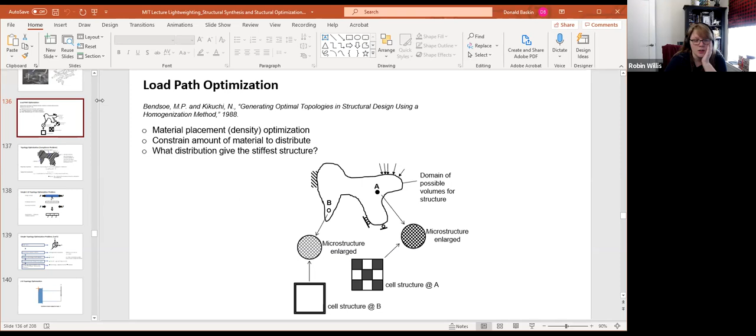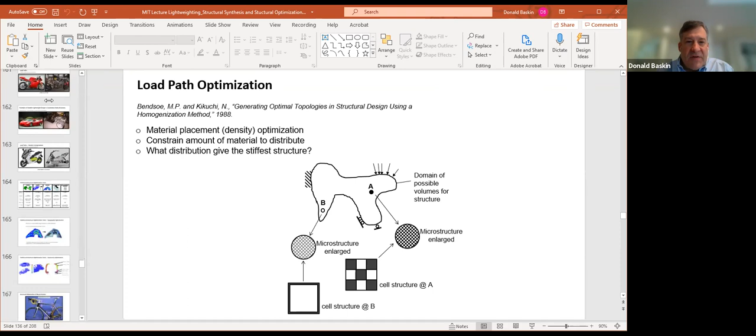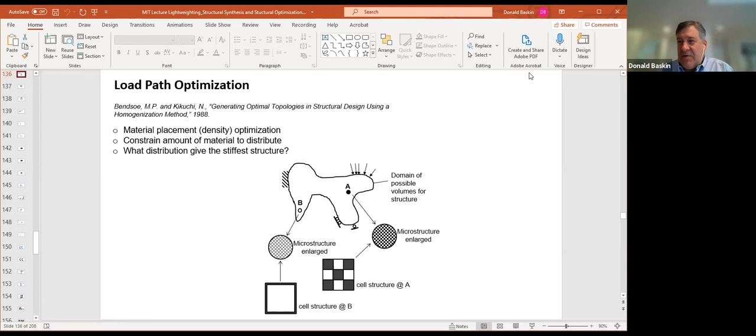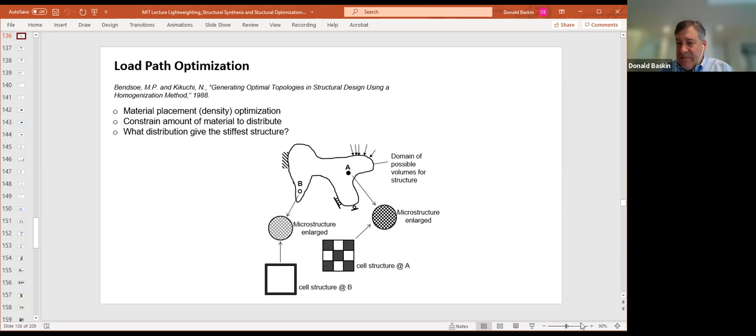I did have a question about our lecture summaries. Should we try to edit them down so they're exactly 1 to 2 lines per lecture, or is that more of a general guideline? Well, I don't know Professor Eager's exact policy, but I know his philosophy: in any given lecture there's only so much you'll find important, so there's only so much you should worry about remembering. Whatever it takes to feel like you've written down what you need to know, whether it's 1 line or 1,000, I'm sure he'll be okay with it. That's what I'd say.

How many lines do you think you're writing per lecture? I mean, usually like 2 or 3, it's just some of them. Like the strengthening mechanism lecture, for example, because there were so many different types, having a note about what each one was makes it a bit bigger. Well, if that's what it takes, that's okay.

I think this is something good to carry with you outside of university, whether you go into academia, industry, or government: get in the habit that when you're out of a meeting, you sit down for a couple minutes and ask, what did I really learn today? Writing it out makes it stick, at least for the way my head works. I'd remember it for years, the importance of that particular lecture. So whatever it takes to accomplish that.

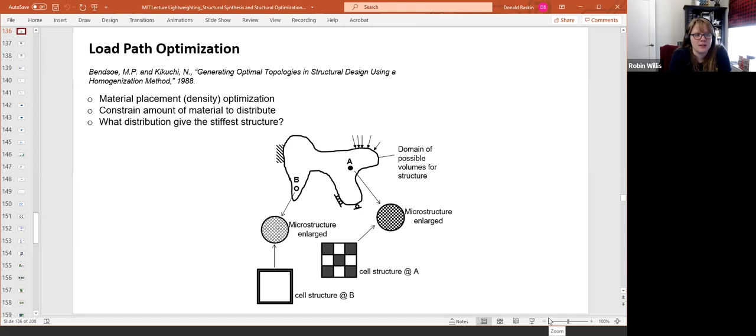Robin, I don't know if you saw, but there was additional guidance in the syllabus that whatever you submit shouldn't be more than 3 pages, which for a double module like this comes down to about 1 page, if that helps refine it. That's kind of what I was asking, especially for me. I like organizing things in bullet points and sub-bullet points, but that expands the technical length since you're not taking up the full page for each bit.

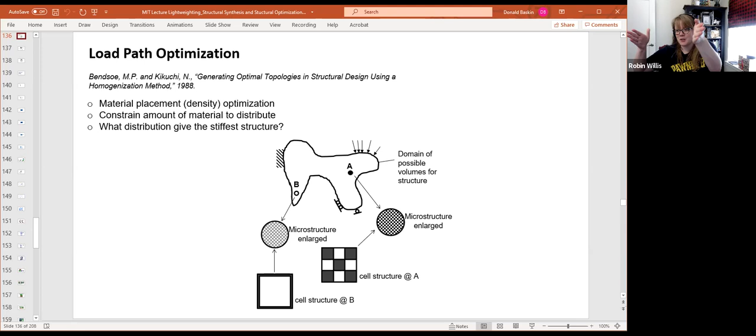That's right, he's not going to bark at you, don't worry. And if he does, just tell me and I'll say it was okay, blame it on me.

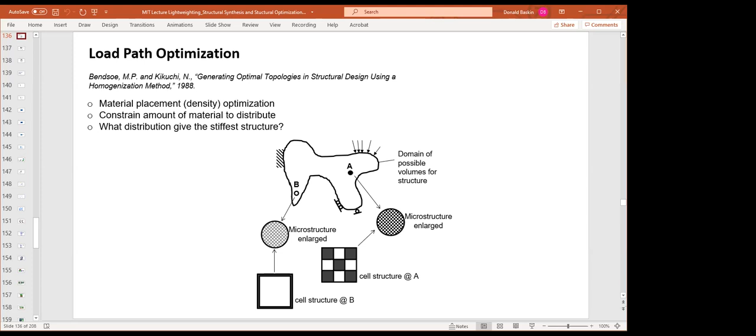So Sophia and Ryan, did you guys get the email I sent out yesterday about lecturing from Zoom rather than in the classroom? Yes. Okay, I'm really sorry about this. My wife's in the hospital today, and I had to get the kids off to school. By the time I got them on the bus, I knew I would not make it to Cambridge in time to be in building 4.

No worries at all. But I should be back at our next lecture, which I think is not next week, but maybe the week after. I think there's a holiday next week, is that right? Yeah, on Thursday.

Okay, so the systemic part of it, I think, is done. What, Ryan? Oh sorry, I didn't say anything. Oh, I thought you did, I thought that was you. Sorry, your microphone went on the second the person finished talking. Oh, that was me, I said it was Veterans Day. It's a holiday. Okay, Veterans Day.

All right, well good. Okay, so we have a fun lecture today, might as well get started. And because I'm not in the classroom today, if anyone wants to go over this sometime outside of class, I'm happy to meet you guys anywhere at MIT and we can talk about it. Again, I can bring in some of the 3D models and things if you want a closer look.

So here's one of the most important topics we talked about last week: the idea of what happens when you combine finite element analysis with numerical optimization algorithms, and how you can use that to your advantage. The answer is that you can have a multi-dimensional design space, and then iterate through different designs within that hyperspace of variables to come up with optimal designs that are either light, strong, stiff, or whatever your design requires.

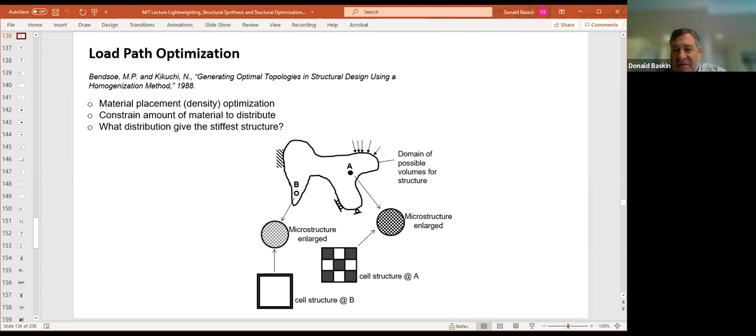Their strategy was this: suppose you had this design space, a packaging volume where you could put structure in, and you discretize that down into finite elements. Then you choose as the design variable for each element a density, and the design space varies through different combinations of densities for each element. By taking the aggregate strain energy of all those elements, once you've applied the boundary conditions, you find the place where the combination of densities gives you a minimum.

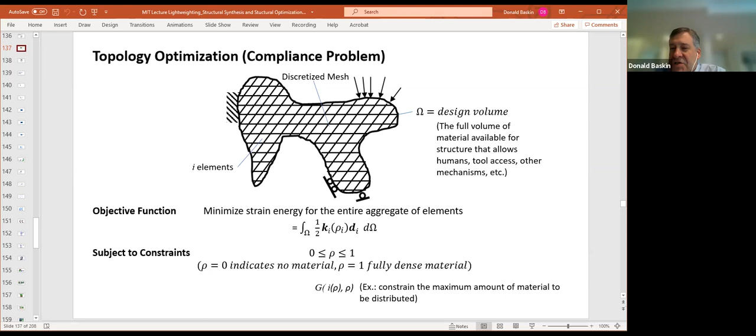So do you choose whether you're optimizing for strength or stiffness, or is it always stiffness? In this case, you are optimizing for load path, so you're optimizing for minimizing the strain energy. Your objective function is strain energy, the aggregate strain energy of all these elements added together. Once you've found those combinations of places where you have high density, if you design a structure and put load beams along those places where the optimizer distributed density within the packaging volume, that's where you'll have the most efficient design. So I'd say the stiffest at the least weight.

Okay, so it's really designed. It's really, I guess maybe it is designed for stiffness at the end of the day. I'd have to think about that.

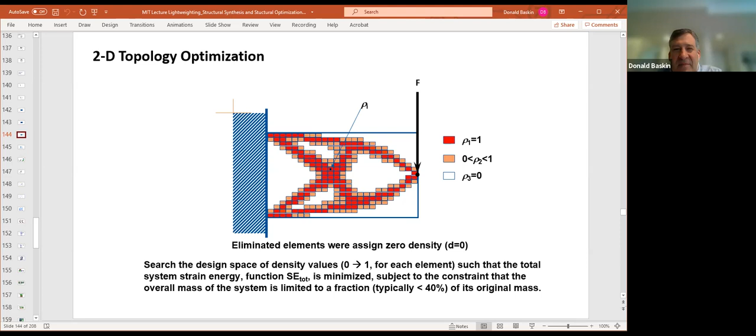But anyway, so we talked about this, and then we gave this little example where we had 500 elements in this cantilever beam, and we pointed out that this can be very readily scaled up into millions of elements, assuming you've got a powerful enough computer.

Here's an example of a project I did when I was an engineer at Chrysler. We did a lightweight body structure for a big SUV, and we found the most efficient load path through that potential packaging volume for an SUV. We eventually converted that into sheet metal, but we identified the most efficient load path using topology optimization, scaling up to 2.3 million elements.

So there's 2.3 million elements, and each one can have a density between 0 and 1. You have so much mass, and you distribute your density to each of these elements, then find out what's the best place to distribute them that gives you the lowest aggregate strain energy—that's the most efficient design.

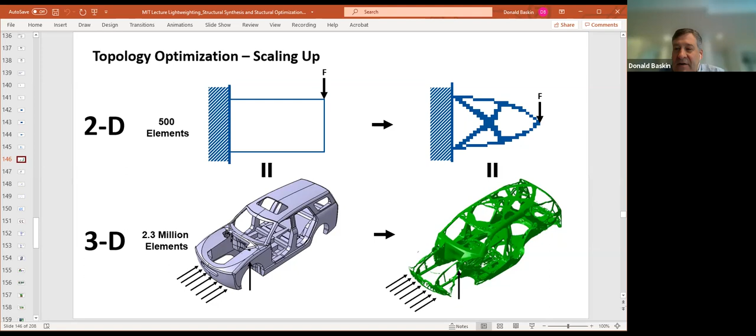And we talked about packaging volumes. The packaging volume can be anywhere you can put structure that doesn't violate things—like you can't have a structural member through somebody's head or through an engine or transmission. You might use the transmission or engine as a structural member, but you couldn't put a load path perpendicular through it. You have to hollow out for things like the motion of the wheels, places to put engines, and sunroofs.

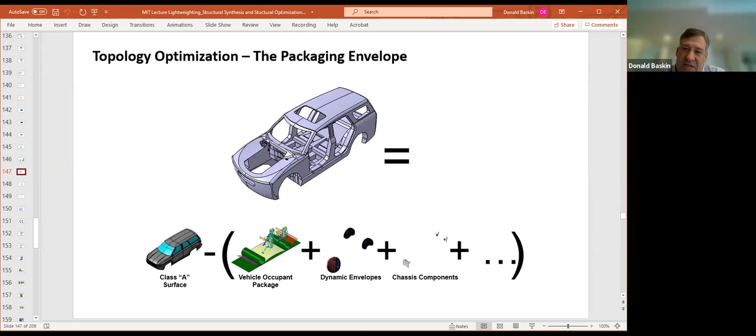We talked about different loading conditions you put on a body structure: front impact, rear impact, bending, torsion. These are approximations of real world loading conditions, and the quality of your results will depend deeply on how well you figure this part out. How do you simulate the different types of loading?

One great example is impact. Impact is a short duration, high energy loading event. How do you simulate that with something that looks like a static load? The first approximation we used was to distribute the loads over the front and rear bumpers to simulate front and rear impact respectively. But since then, I'm certain the community has come up with better ways of simulating impact.

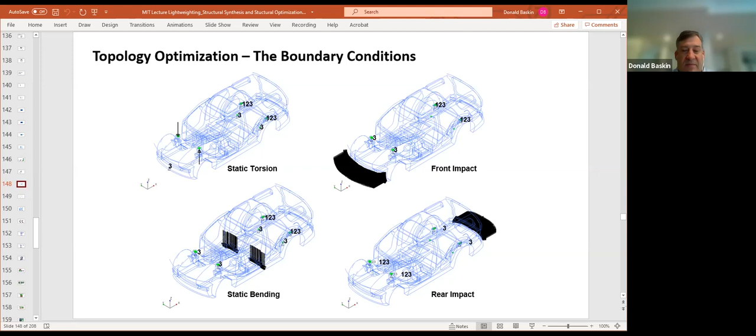We talked about how there was this other method of calculating efficient load paths using another program called soft kill option. The soft kill option mimics tree growth, where it places mass where the stress is. That's kind of how real trees work—they sense where they're stressed out and put more wood cells there, growing to take up that stress.

The problem with something like this is that it's very complicated, and it's really difficult to take this type of organic looking structure and convert it to something you can actually build. Say, car bodies are almost always made out of sheet metal.

We did that by first drawing what we called a beam model. We got about 6 engineers in a room with these results, and we hashed through it for about 4 hours, yelling at each other about where the load paths were and where they weren't. Then we created these beam structures to create an abstract of this—something simpler that could potentially be more manufacturable.

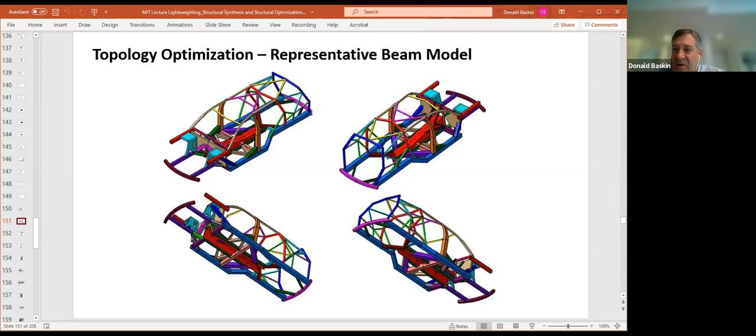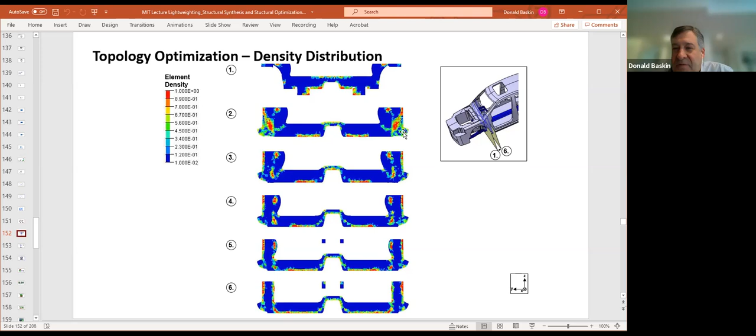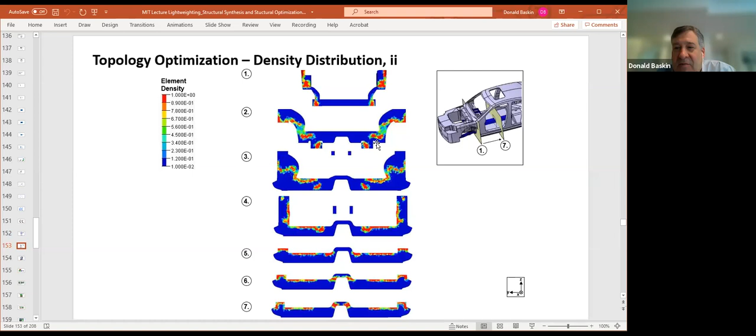This is a lot of fun—going through these topology optimization models and seeing exactly where the optimizer has placed density. When you look at this result, this is where the density is above some threshold that you can typically set in the software.

You can tell the software, show me only places where the density is above 0.8, for example. This is just another way of looking at that. Sometimes this is more helpful.

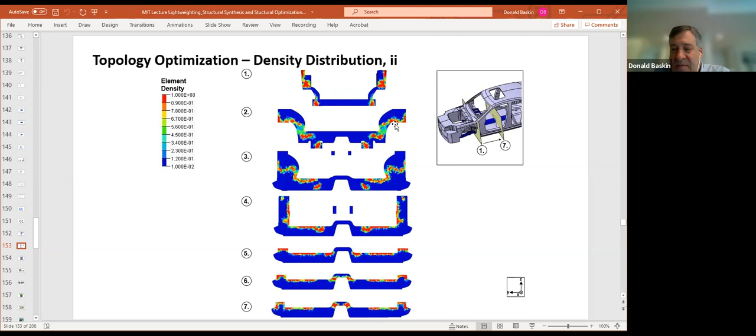And here's another example. You see another cross section here where the optimizer has distributed density to minimize the aggregate strain energy. And here's another cross section.

You can flip the direction and look at cross sections before and after the car body, for example. This is a D segment vehicle—like your Toyota Camry, or the Ford... what do they call that one now, the Edge, I think, or something like that. Honda Accord—this is the vehicle that would compete with that.

You can see here where the optimizer placed density—that was still the front impact load case, correct? Correct. This is an aggregate of the 6 different load cases I showed on the previous page. We applied all of those simultaneously. In this result you're looking at right here, they were all applied simultaneously, but we also did them individually to understand what each loading case would do in terms of creating density maps.

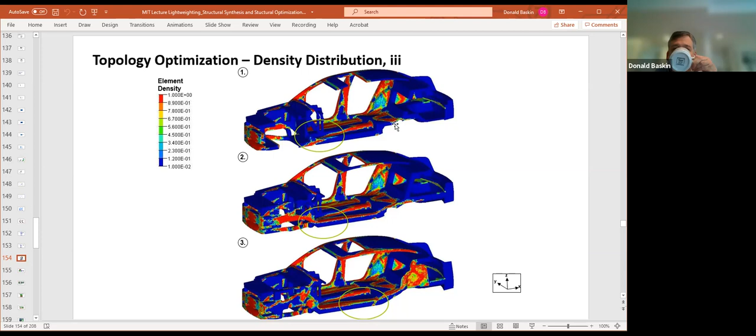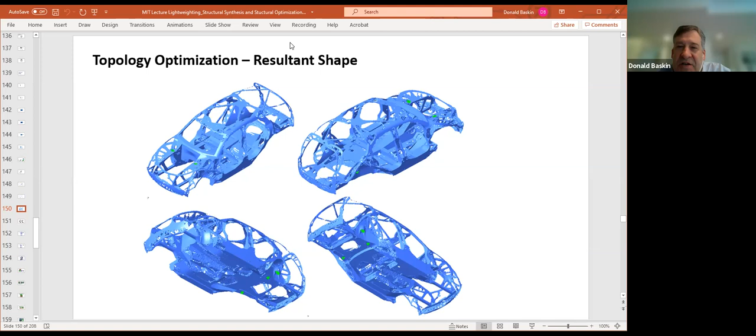What I want to show you here is kind of interesting. If you look at the roof structure up here, the optimizer creates all these K and X structures. From experiments we did after converting this to sheet metal, we found that these K and X structures were extremely efficient in improving torsional rigidity of the car body.

It's interesting because there is no car on the road that has this—they're all basically just cross members, straight lines. There's nothing out there that has Ks and X's, yet it's so incredibly efficient. There might be one Volvo out there, but we found that might have been an accident.

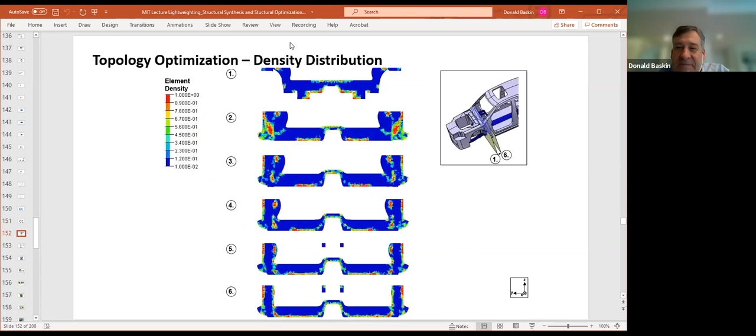We also did this method using individual components. So here is a shock tower. As I told you before, this is where the springs and shocks feed their load into the body structure. This is typically one of the highest stressed areas under normal driving conditions—perhaps one of the highest stressed areas in the car body.

I don't know if the structure ever went into production, but I sure pushed like hell to get it into production. This was supposed to go on a Chrysler Sebring at the end of the day. I don't think it actually did go into production, but normal shock towers today that you'd see in a car don't have these cutouts, for example.

See this cutout right here, where my cursor is? That cutout can save a couple grams, maybe a kilogram in total. So this is interesting - this takes weight out of the vehicle. It doesn't affect the stiffness, the strength, or the fatigue resistance of the car. And you've got this opening that saves you some weight.

So the problem is that in some vehicles, this means you're getting a lot of junk, road grime, dirt, and water entering the engine compartment, which isn't necessarily desirable.

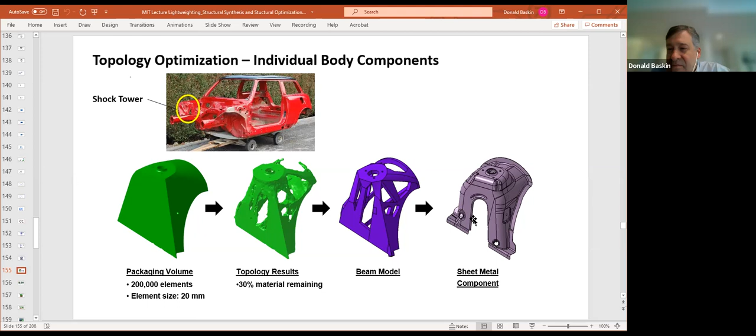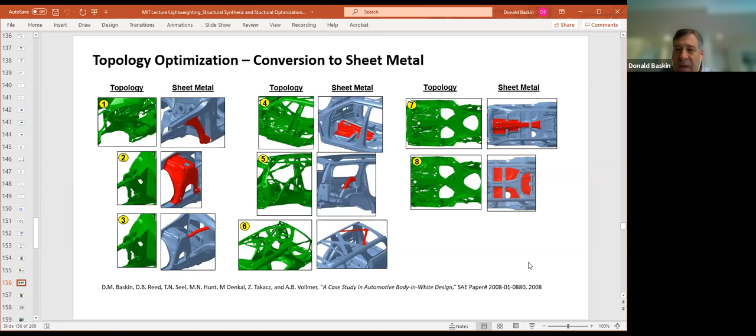After this exercise was complete, we decided to go out and start benchmarking vehicles to see if we found evidence that this topology optimization was being used anywhere on real vehicles that were driving around. And the management of Chrysler was very surprised to learn that, oh wow, it really is true that our competitors have been using this, and probably been using it for a long time.

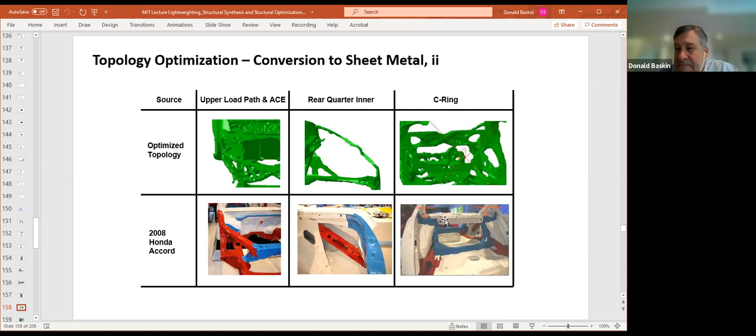Beautiful piece of engineering. What's interesting, though, is they don't seem to save that much weight by using aluminum, which always surprised me. If you look at vehicles that compete with this, like an S-Class Mercedes or the big 7 Series BMW that competes with this Audi A8, those cars are made out of steel and they're not that much heavier. So I always wondered what was going on here. I think the answer may come down to fatigue, and I'll talk about that in a future lecture.

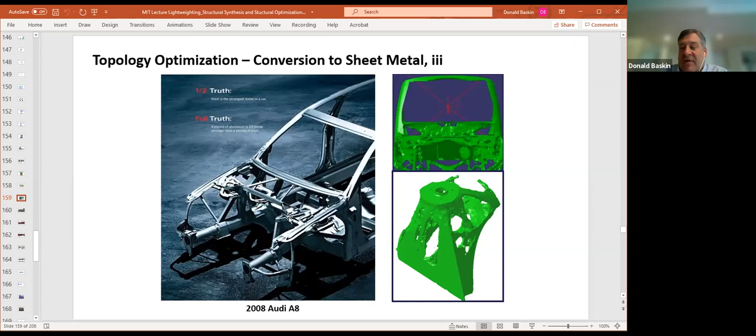Aluminum, unlike steel, doesn't have a fatigue limit. There's some combination of stress and number of cycles where an aluminum part is going to fail no matter how big it is. Steel, that's not the case. There's some combination of loads and cycles where it'll go on forever and you never have to worry about the part failing, unless it corrodes away.

Any questions on this one, guys? Nothing? Okay, we're good.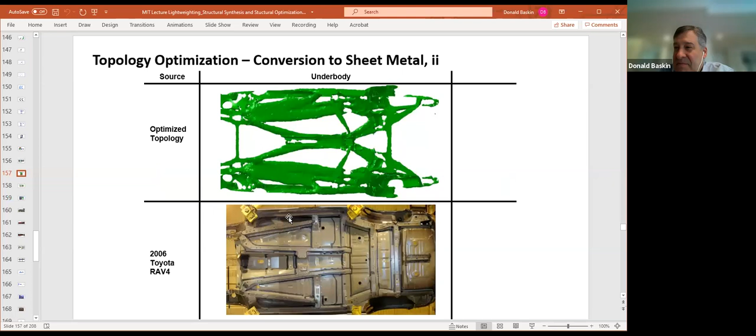So in talking about load paths, what do you guys think that this Formula One car from the 60s here on the right and this tractor have in common? Someone want to venture a guess?

Both using the engine and the transmission as a load path. Yeah, you probably read that up here, right? Oh, I missed that.

No, this fascinated me. On the right here, this is the Lotus 49. This is considered a milestone Formula One car, and the reason it's important is because this is the first time any Formula One manufacturer had ever used the engine as a stress member. So the stress member becomes the load path, right? It makes all the sense. You've got this big, gigantic block of aluminum, maybe 3 or 4 blocks of aluminum, and they're big, stiff, and strong. Why would you put a structural member next to it and have all that redundant structure if you can just use the engine as a structural member?

Certainly, when I was at Chrysler, I was all excited by this—wow, isn't this cool? What a genius Lotus is, and their founder Colin Chapman, that they came up with this idea of using the engine as a stress member.

And then one day, after I moved to Boston in 2009, I was at some ice cream stand up in Concord somewhere, and I came across this tractor. I thought, oh my God, they weren't that smart—someone had already done it, because here's this tractor where the engine and the transmission are the primary structure. The axles from the rear wheels and the front wheels pretty much bolt straight up to the engine here. This old tractor from 1917, built by Ford.

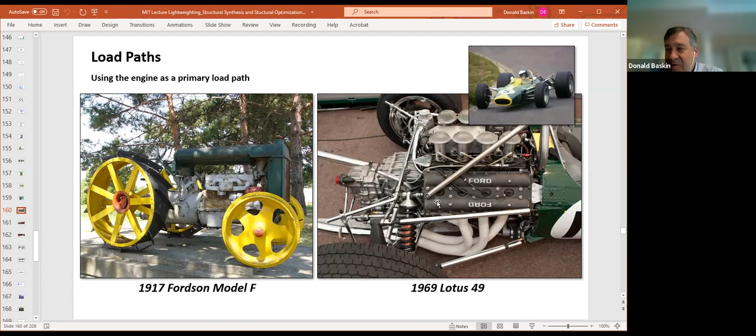Some other clever things Lotus did: for example, they used tubular frames, and rather than having flexible tubes to supply oil or go to the oil and water coolers in the front of the vehicle, they ran the oil through the structural members. That way they could reduce weight by not having extra rubber or stainless steel tubes going to the radiator and back. That's how you reduce weight—you use a component that already exists for multiple functions, so you don't have to create a second structure that just adds weight.

This Ducati here, this is my friend's Ducati, lives in Berlin. You can see here on the left the motorcycle, and on the right with the bodywork taken off you can see the engine right there. There are two cylinder banks—one going up, and one going fore-aft.

This gray tubular structure connects the forks to the engine. Then there's the structure that connects the seat structure to the engine, and the rear suspension basically bolts directly into the transmission, which is right about here.

So as you drive down the road, the engine is actually under bending. This is how Ducati reduces weight, because they don't have to put structural members underneath the engine, like down where my cursor is going. Those members would probably be in tensile load, because they run underneath the engine while the bending load is down here. This is pretty clever—it's how Ducati minimizes the weight of this motorcycle without sacrificing much stiffness.

You may ask, does anybody do this on a production car? The problem with this technique is that it isn't pleasant from a vibration perspective—we call this noise, vibration, and harshness. When the engine fires and isn't perfectly balanced, all kinds of vibrations come up. If you buy a Ducati, you're kind of expecting that, so it doesn't bother you. But for most customers who aren't Ducati racing enthusiasts, the amount of vibration would be completely unacceptable.

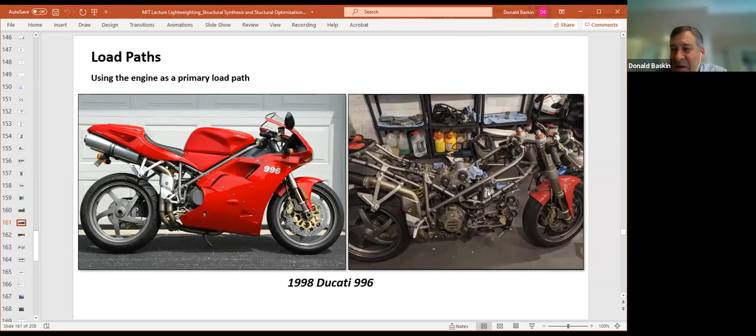Here's a Ferrari—I think one of two cars they ever tried this on, using the engine as a structural member on a passenger car. This is the Ferrari F50, made in the mid-90s, and I think it's the only Ferrari supercar that wasn't successful and actually loses value over time instead of gaining it. It has a gigantic V12 engine directly bolted to the structural member behind the passenger compartment, behind the front seats—there aren't any rear seats. Here's the engine, with some auxiliary struts going back to the transmission, but the engine is hard bolted to the chassis.

A lot of people who bought these cars probably weren't too happy with the amount of vibration the engine kicked up. When they replaced this car with the Enzo in the early 2000s, they didn't use the engine as a structural member again. So in a four-wheel vehicle, using the engine as a structural member is really only confined to racing cars, although it is definitely a way to improve weight.

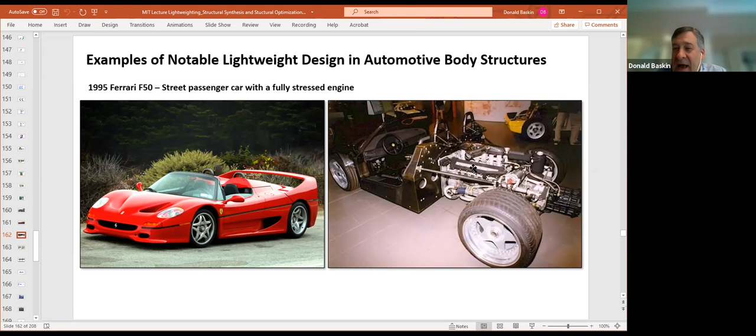However, here's where things get cool—the electric vehicle may enable that concept to come back, because with an electric vehicle you don't have the vibration, since there's not a bunch of burning gasoline in there. Here's a scooter I think is really interesting that BMW made in 2018. It's an electric scooter, shown here with the bodywork removed. This center casting is actually the battery box, filled with lithium-ion battery cells, and the rear suspension—or rather the motor—bolts directly to that structure.

The motor's back here, and the structure that supports the forks bolts directly to the top of the battery housing, putting this battery housing in bending. The lithium-ion battery cells don't seem to care much—there's a little bit of stress there, but I think they're okay. This housing also contains the inverter and control unit. The inverter converts the DC signal of the lithium-ion batteries to AC, so the electric motor can use it to turn its armature.

This is really clever, and it excites me. Back when I was at Chrysler, around 2008, people were sticking their noses up at electric vehicles. We were aware Tesla was trying to develop an electric car, and we all kind of said, 'that's impossible, it'll never work, no one will buy it.' We were pretty wrong, obviously. But I kept saying, look at the opportunity here to reduce weight, because you can use heavy things like battery boxes as structural members.

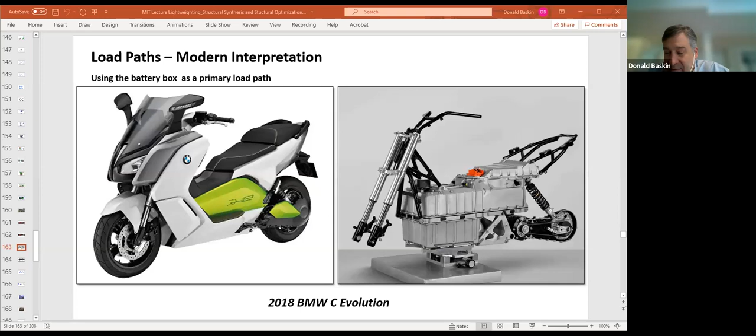So I've shown you how finite element analysis and numerical optimization can be linked together to create this tool that helps you find the most efficient load path through a given packaging volume, given a certain set of boundary conditions. This is one method where these two subtools come together to help us lightweight structures. Here's a graph describing a couple different methods of how you use these combinations of numerical optimization and finite element analysis to reduce weight.

Another tool is called topometry optimization. So there's topography, and this next one is topometry. Topometry optimization uses these tools to determine the optimum thickness for each panel in a sheet metal body structure, or any sheet metal component. In this case I'm showing a body structure. The design variable is the thickness of each sheet. In a Chrysler product there may be 300 or 400 sheet metal stampings in a body structure; in a Mercedes there might be 600 stampings, because it's all about that complexity. With that many panels and given loading conditions, you can use a numerical optimization tool combined with finite element analysis to determine the optimum thickness for each panel.

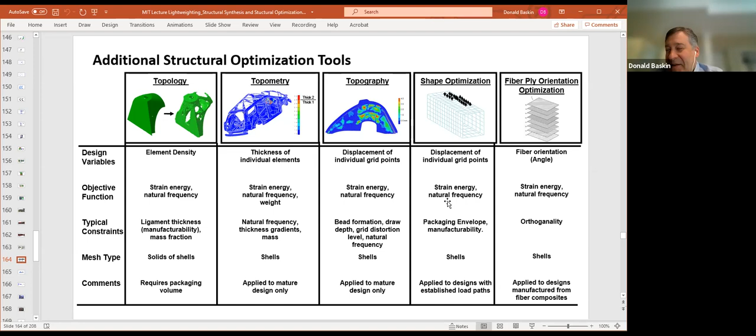Okay, I think we're out of time here. We should probably stop, but I have some examples here of the application of some of these tools that we used at Chrysler, and how we came up with different rib structures for a rear wheel house - that's the metal structure that goes over the wheel in the rear of the car.

Here's another example where we used topometry optimization on the various pieces that shingle together to make up the ring that goes around the rear lift gate on an SUV, and how we were able to reduce weight.

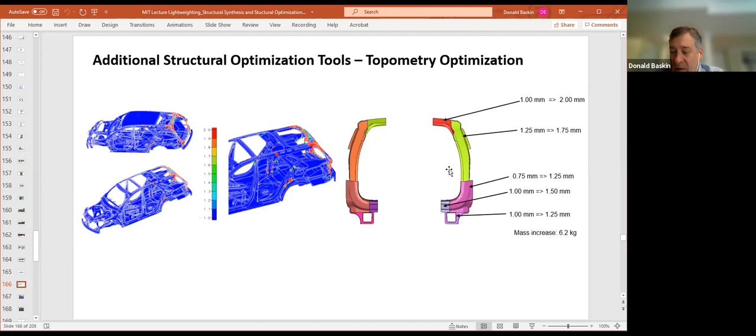And let me talk to you about these two bicycle frames I have here that show how each and every tube along every cross section has been optimized to maximize stiffness with the least amount of weight. These bicycles are incredibly lightweight and incredibly stiff, and I think this is a great example of where these tools have been used with great effectiveness.

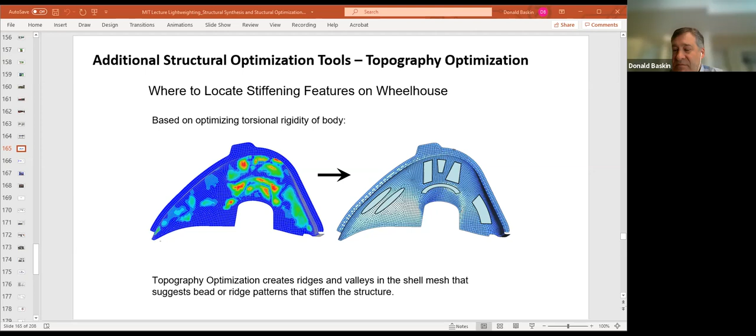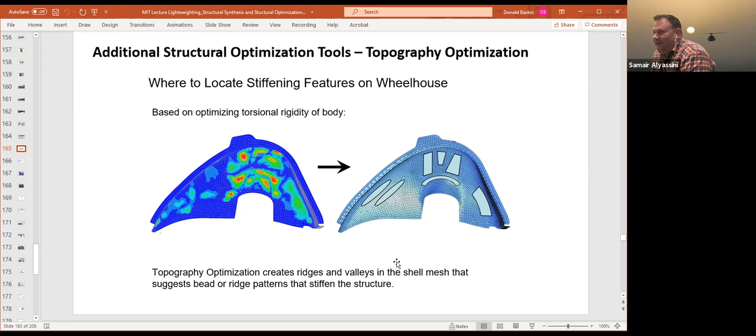Robin? Maybe one day I'll tell you my horror stories about having to do composite repair on V22s. Composite repair seems like a really bad idea to me, honestly - they have drastically varying layer orientations, and they use very unique single direction cloth. That's the way to really get the efficiency out of composite - typically you see a lot of interweaved cloth used, and then you could just orient every 45 degrees. But when it's single direction, each ply has a very unique orientation that has to go in.

The problem with woven material is that you've got kinks in the fiber, which intrinsically reduce the stiffness - you want to use those fibers when they're straight. That's how you get the real stiffness in these bicycles, these are not woven, these are all unidirectional plies. Some of these things have 600 little plies put together by some poor guy in Taiwan with a pair of gloves on, just laying things up. It must be miserable, but they do a great job of it - and I do mean Taiwan, that's where most of these things are made.